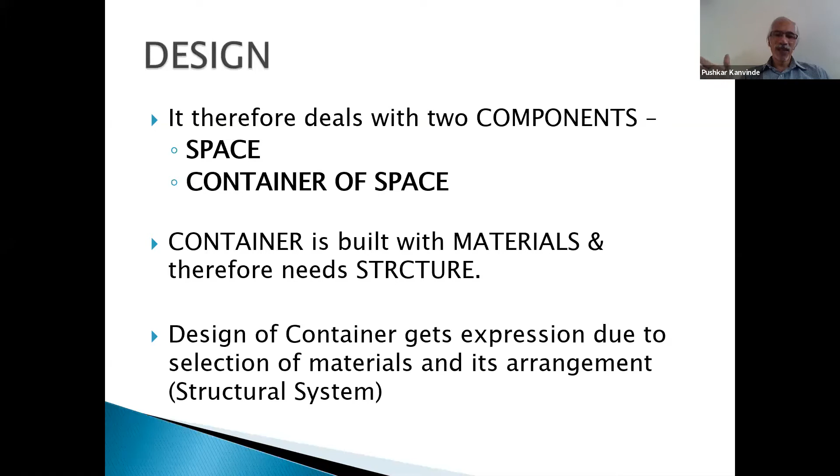So this design, of a container and the space contained within using materials, is based on 2-3 different parameters. The most important is the body of the container, or the materials used, like structure and finishes. Then the soul or purpose, how it looks, what it is meant for, and whether it satisfies the physical and psychological requirements of the user. That is the soul. Together, body and soul create an expression which holds the particular function for which that space is designed. So keeping in mind the expression or function, you create a system or soul with a particular aesthetic in mind, using material which gives a particular finish and structure. So all these 3 parameters coming together create an architectural design.

Now this design is based on 4 different influences which are essential to make it a success. First is anatomical - if it is being used by human beings, then it must respect human anatomy, therefore anthropometry, and be comfortable for the person or persons to use that space.

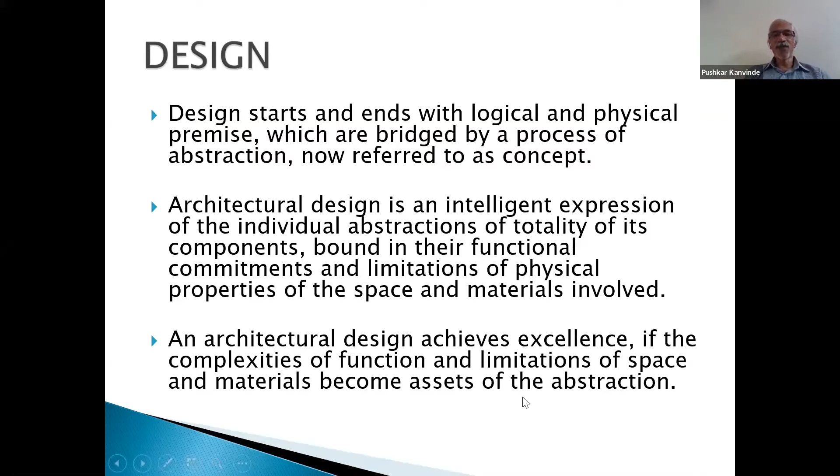Only when these conditions occur does it become excellent. Now, the process of design is neither purely additive nor subtractive. This is something most students try to do. In the first year, you all learn how to create a bubble diagram, showing where the spaces will be and what is the relation between different spaces within the building, and then put them together, adding to one another.

Now, when you are doing that, many times you forget or don't pay much attention to what kind of form it is taking. So it ends up in a container created by joining many different spaces to one another, and whatever evolves is accepted as a form. This is a purely additive process.

Now, the subtractive process is where you first imagine a form, like 'I want my building to look like this,' and then whatever is not necessary, you try to remove, making it a subtractive process where things are removed from a mother form to create a subset of form. This also has its own limitations, and many times a lot of compromises are done when this kind of subtraction is done.

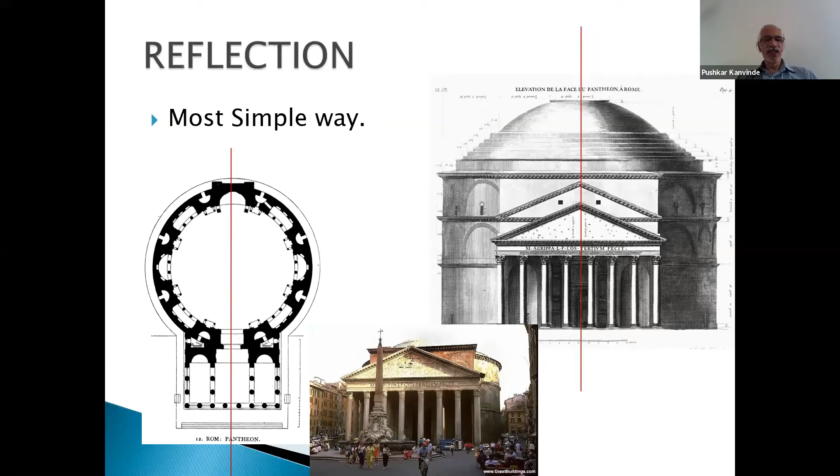Same symmetry is seen in many other cultures. For example, in a Hindu temple, it is symmetrical because the temple is considered to be a body - it is derived from the body of a person, or man. So it has to be symmetrical, symmetrical along the axis. Mosques are also symmetrical. And why are they symmetrical, both temple and mosque?

Because there is one place where you want to concentrate for the prayers. They are all places for prayers, and there is one place - for example, in a temple, that's the deity. In a mosque, it is the mihrab and the maksura wall. So you have to concentrate at that place. So to give importance to that place, taking that as an axis, on both sides the things are symmetrical.

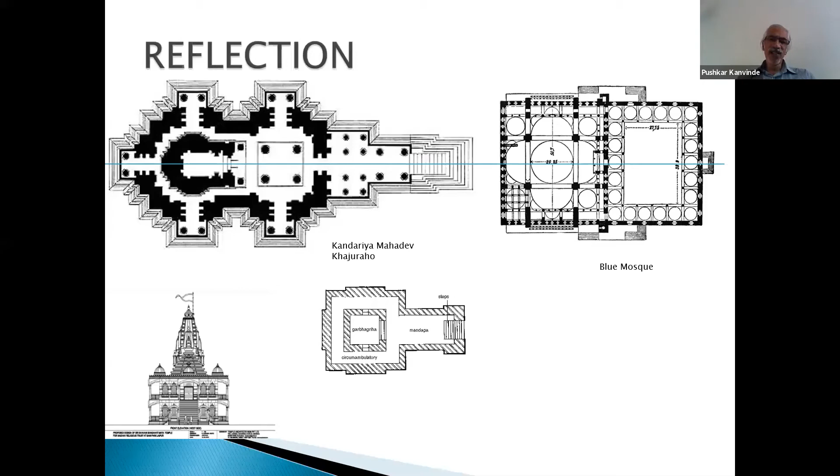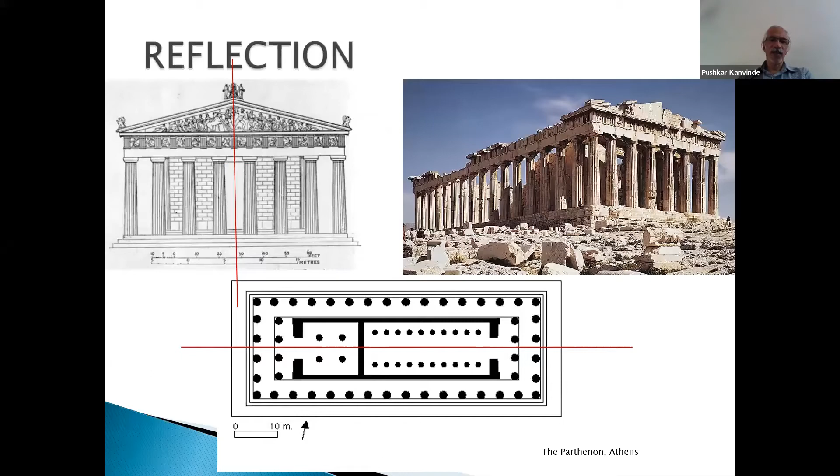Now, is it only restricted to history? No. Later on also, if you see the Greek history, the temples are symmetrical - this is the Parthenon. If you see the Renaissance, the complete arrangement of this plaza at Vatican is symmetrical. The same thing you will see in New Delhi - the big mosque of Delhi, Jama Masjid, is symmetrical. The complete arrangement of a Hindu temple in terms of the axis, in terms of the Garbhagruha, the Natamandapa and Jagmohan, Gopuram - all is symmetrical.

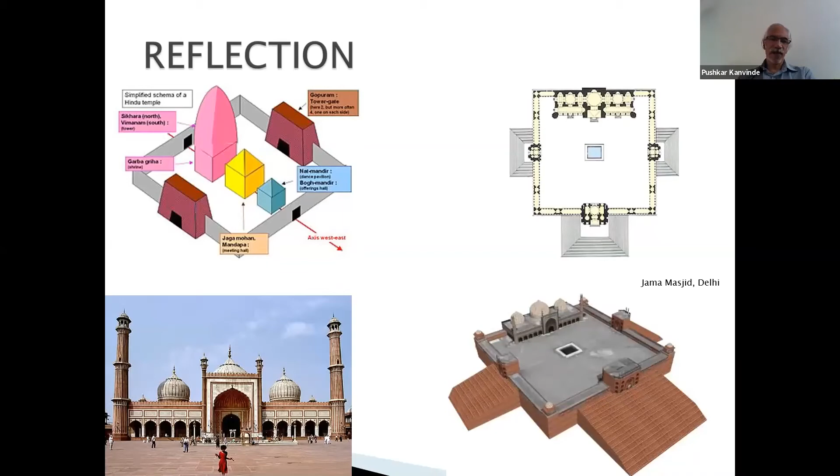In churches also, symmetry plays a very important role. That symmetry tells you that in the center is the main door. If this is not symmetrical, you have to find out where exactly the main door is.

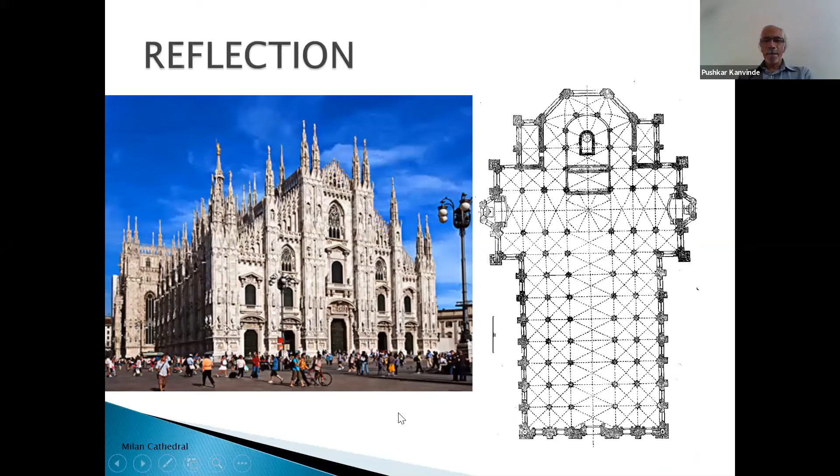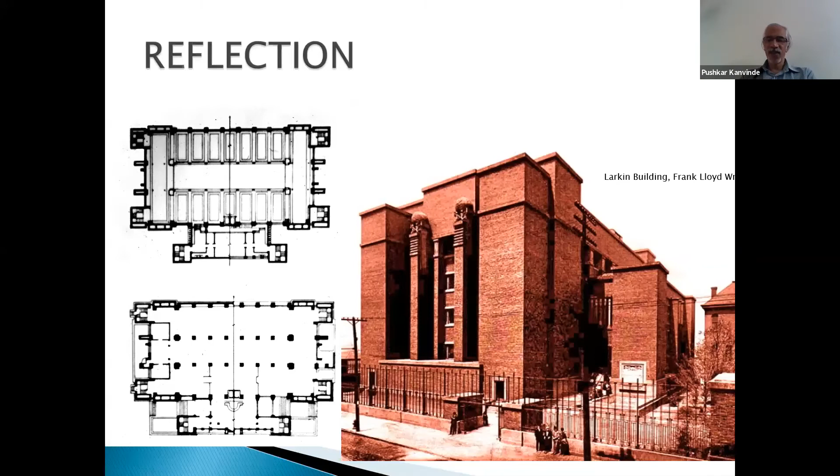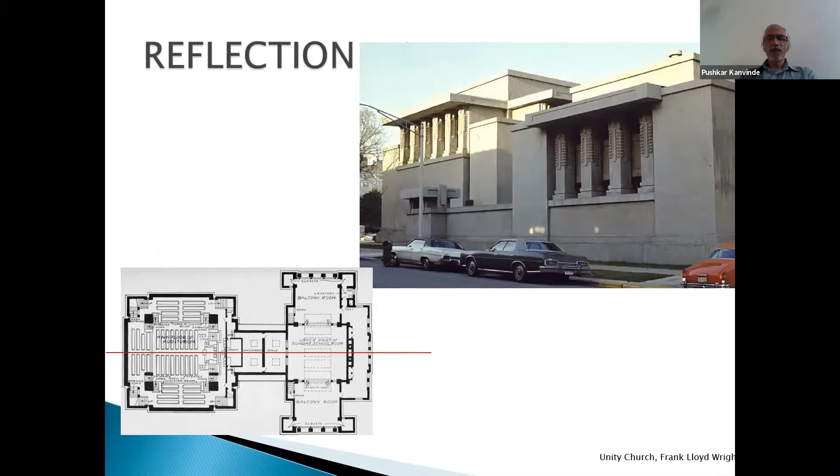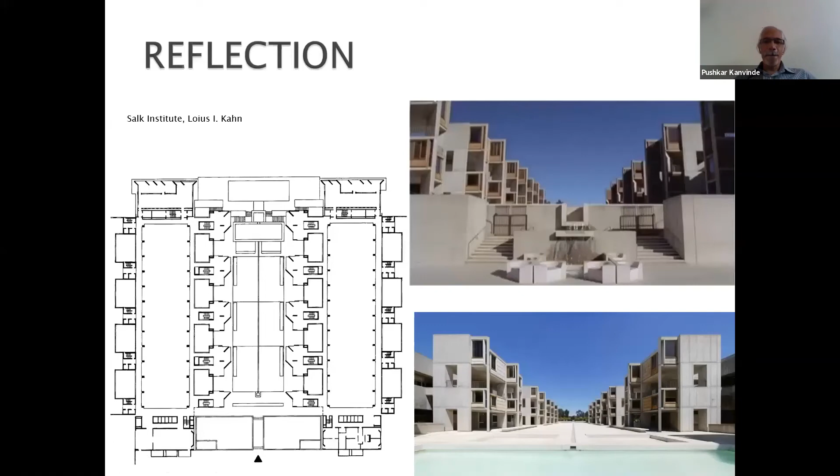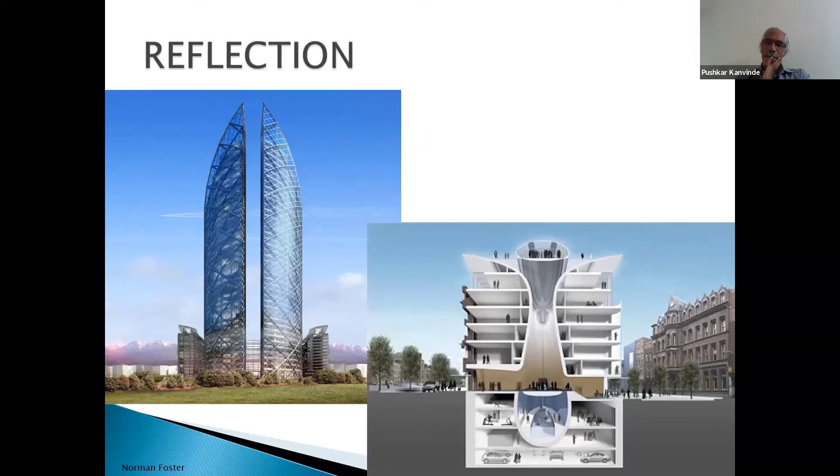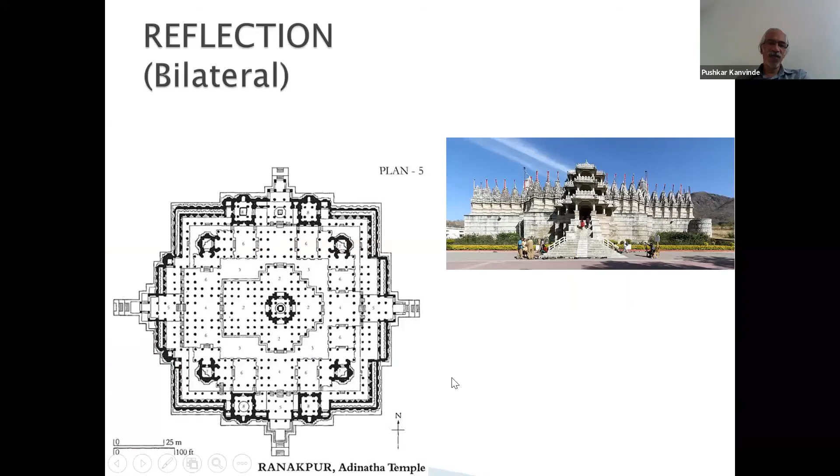Now that was reflection along one axis. There could also be reflection along two axes. For example, this famous temple of Ranakpur has two axes and it is symmetrical along both. Taj Mahal or Humayun's Tomb are again symmetrical along both axes - that is, symmetrical along the east-west as well as the north-south axis.

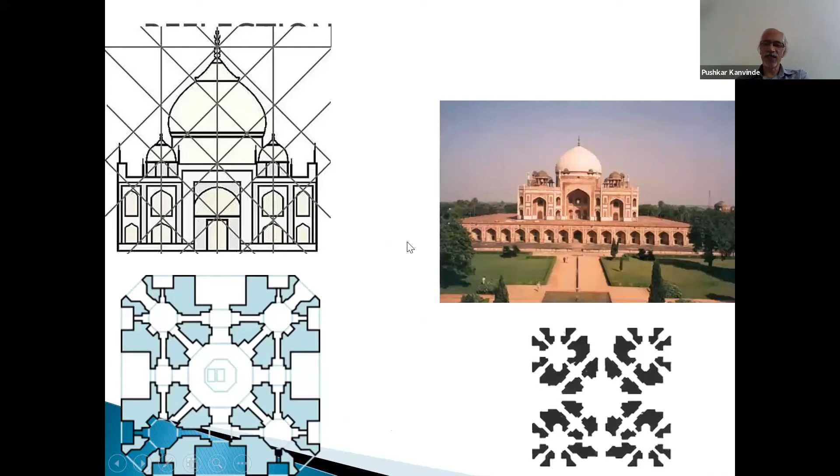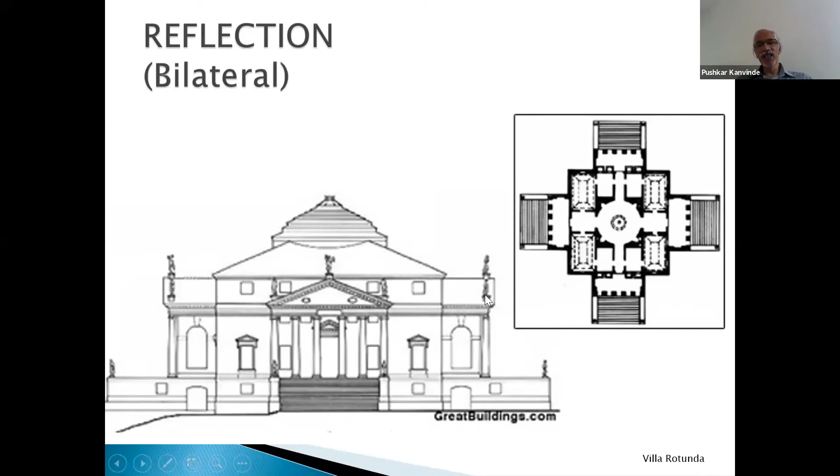So this was not just a fashion of history and not followed by modernists. Even modernists used it very much. But these days, people have forgotten it.

If I go to colleges and schools, very few students try and use these tools now. The reason is they get exhausted by the time they just create that bubble diagram and don't want to take any further effort to come out with a form for a building.

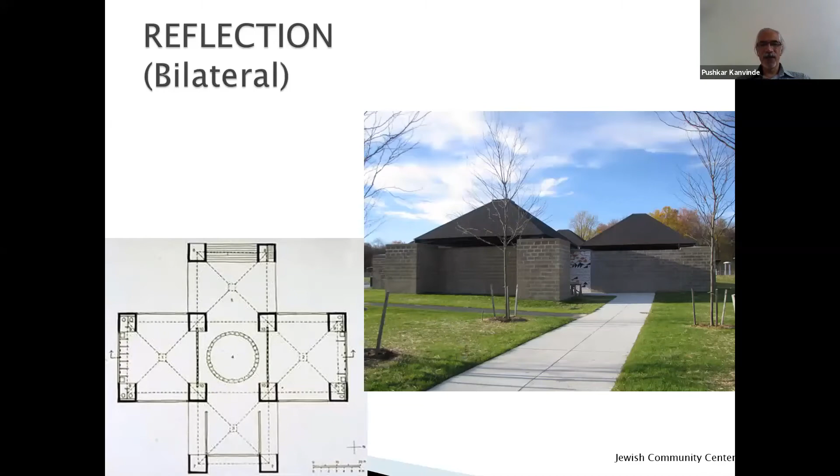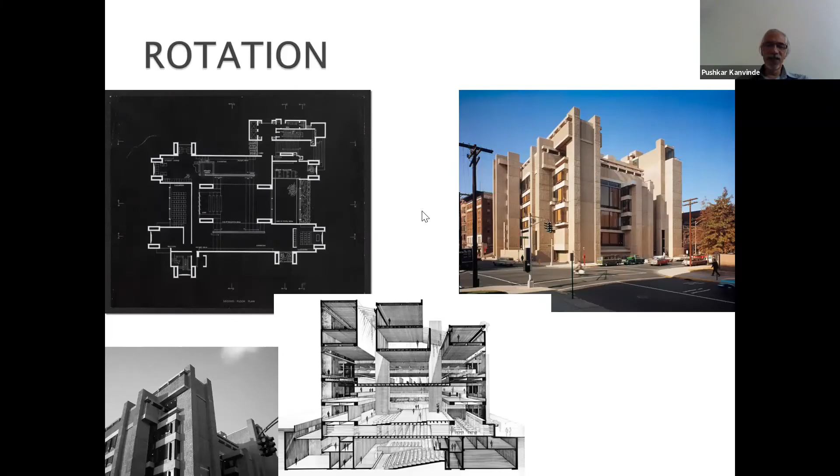I think something went wrong. We have to wait a little till the time it settles. I try to go back. Rotational symmetry was used by modernists in their buildings. Tejas. I think, yes, it's held up for a while. Let's see if it revives. Please bear with me because I think that computer has frozen. Yes sir, it's absolutely okay. I think I will have to restart that presentation. Till the time it opens, if there are any questions on whatever we dealt with, we can deal with that.